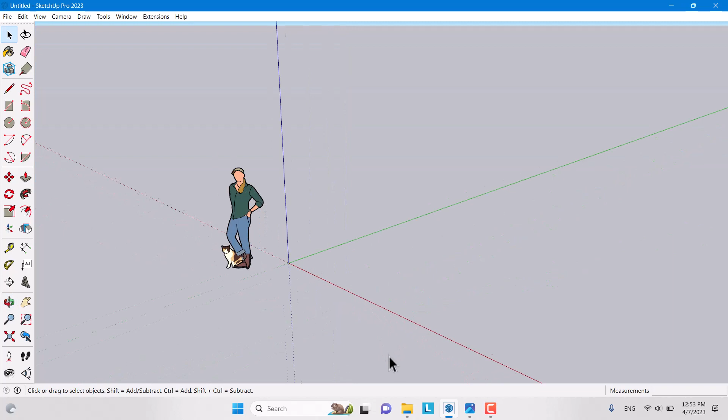Today we want to talk about how we can create this type of electric posts in urban street cities and designings. I'm gonna come to the SketchUp 3D environment and start drawing with this type of electronic box in here with some orange color.

I'm gonna draw some type of stand for it with different dimensions, for example 100 to 200, and now I want to extrude it about 100 centimeter. Alright, this is our base.

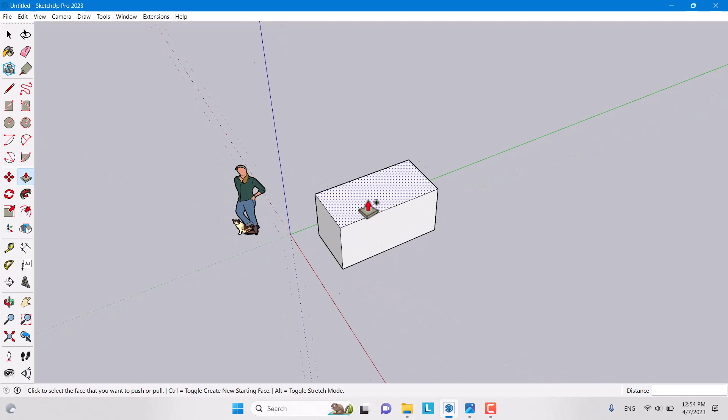I'm gonna click on it and make some type of group in here. Now I want to create this type of orange house and holder, so I'm gonna click on the rectangle and draw it with different dimensions, something around 90 to 56.

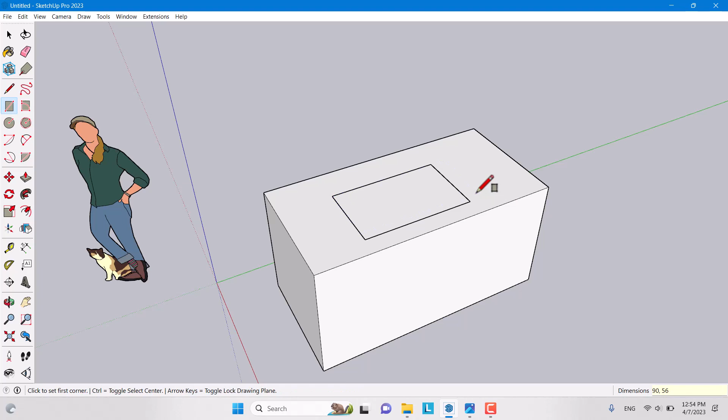Now I want to re-extrude it again, some type of number of 180, and I think it's good now. So I'm gonna click on it and close it.

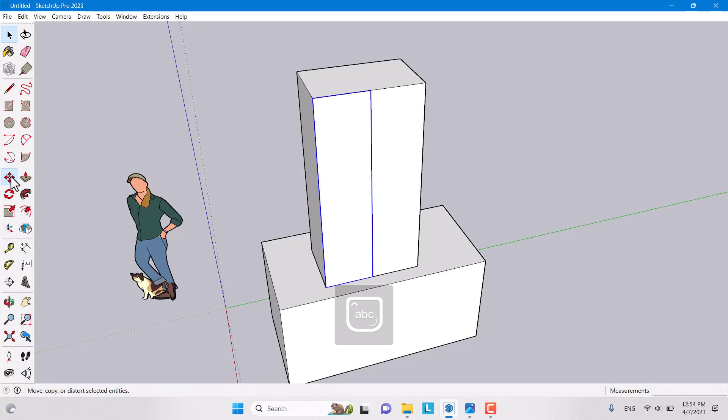Now we need some type of doors for it. I'm gonna draw some rectangle from this place to this place, convert it to a component, call it door, and press enter. I'm gonna make a copy of it here, click on the flip option, and flip it on the green axis.

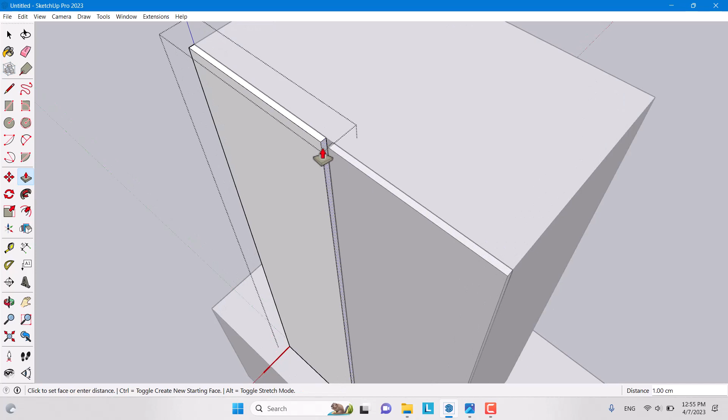So I'm going to double click on it. Now I want to extrude this door something about 1, and now extrude from this place to this place about 0.2. That's good. Now we want some type of details in here.

For example, I want to make some bevel on my door, so I'm gonna click on the offset option. We need two offsets: first offset about 4 centimeter and second offset about 6 centimeter.

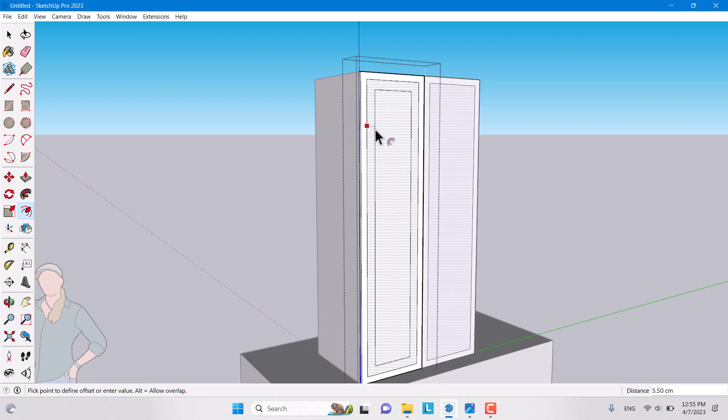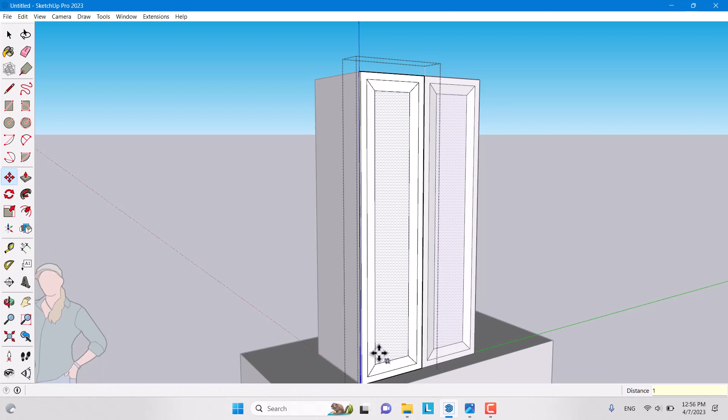Now I'm gonna click on the second face we created, click on the move option, press Alt on my keyboard and left click. If I want to bevel it to the outside, I can move it on the red axis, and if I want to bevel it inside, I can set the number very carefully, something about 1 centimeter. Now we have this type of thing, but I think bevel to the outside is much better.

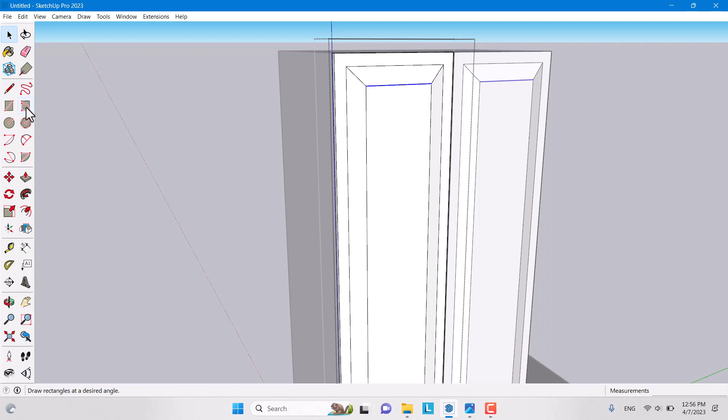So I'm gonna click on it and extrude it on the red axis, some number about 2 centimeter. And for the final detail, we want some type of edges and lines in here, like that.

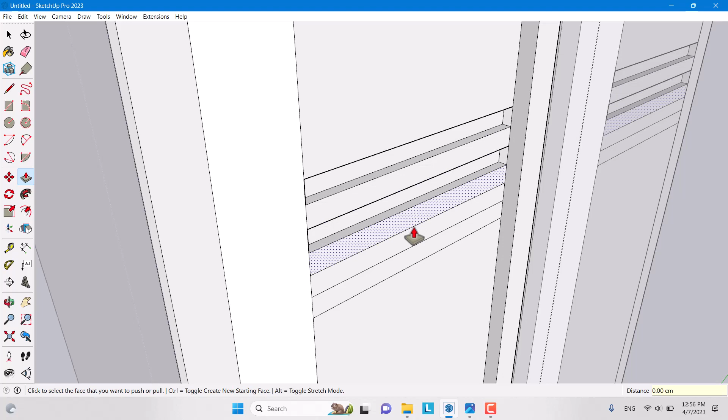I'm gonna create a copy of them and extrude them one by one, for example extrude to the downside about 1 centimeter, like this. And I can delete this line.

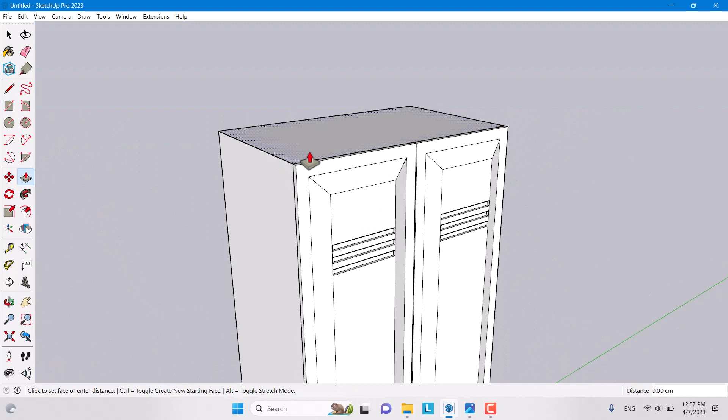So as you can see, this is our locker, and we have some type of sloped roof for it. I'm gonna draw some type of rectangle in here and extrude it a little bit, about 10 centimeter, from this place to this midline, and from this midline to this place, re-extruding it again like that.

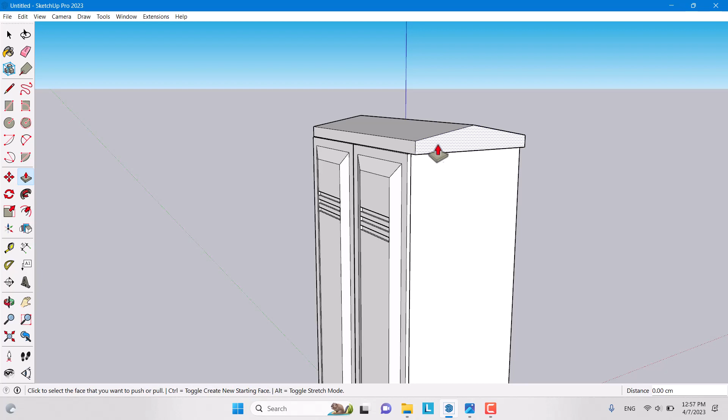And a little bit I come it to the outside, about 3 centimeter each side. I think everything is good, so I'm gonna click on it and create some type of group in here.

I delete this character, select all of them, and move them a little bit here. So now let's get for this electronic post with some concrete material.

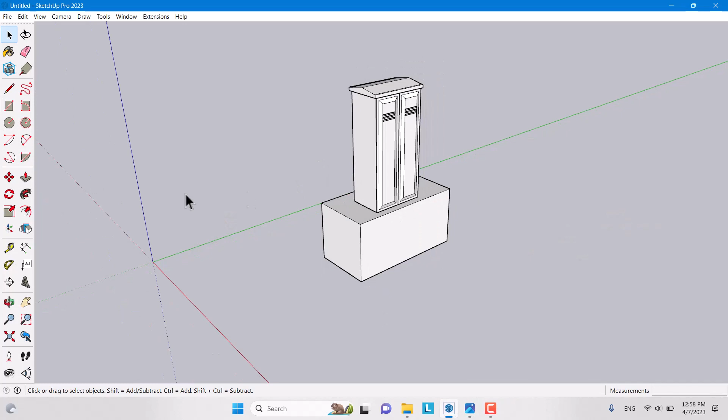Actually these type of electronic posts have two sides with the same shapes on their faces. I'm gonna draw a rectangle with dimension about 40 centimeter to 40 centimeter, extrude it about 900, and then extrude it a half, something about 20 centimeter.

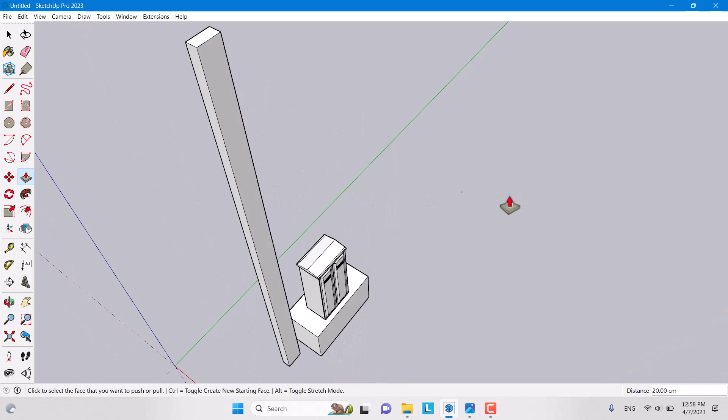I click on this face and want to rescale it from this place about 0.8, and from this place 0.8 again.

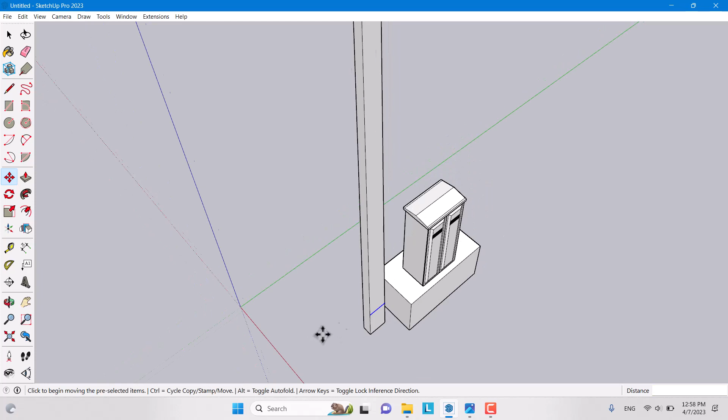Now I come to the downside, click on this edge, and want to make copies of it with different dimensions. For example, every 75 centimeter we need one copy, so I'm going to type 10x, 12x, and I think it's good.

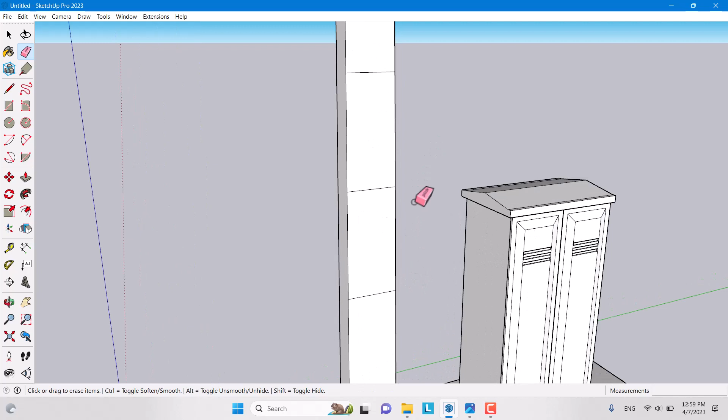So now I want to delete this type of extra lines like that, and now I delete these extra lines in here like this, and now we clean the model.

So I double click on it, create some type of component here called electronic post, and press enter.

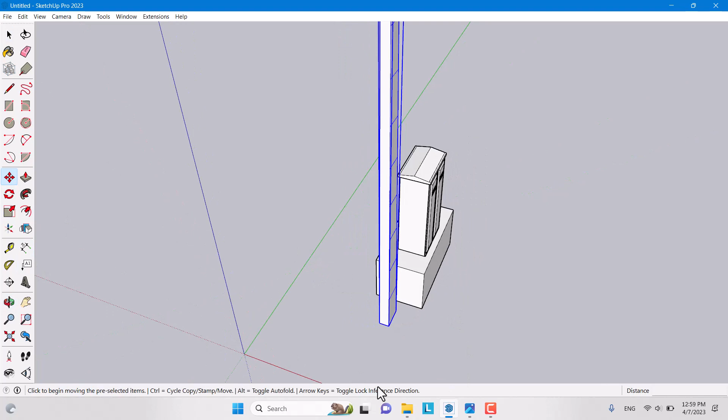So I want to make some copy of it on the red axis. I'm gonna click on it, and now I think 30 is good. I'm gonna flip it on the green side like this, then move it back in here and double click on it.

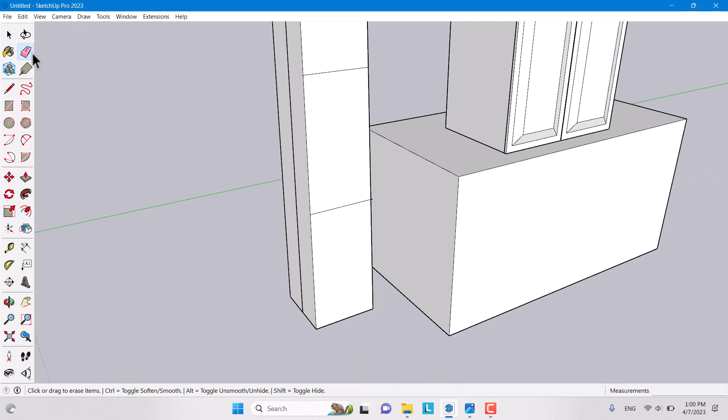So now I want to delete this type of extra lines. I press on the eraser option and delete these lines again. Now actually we have this type of two components same as each other.

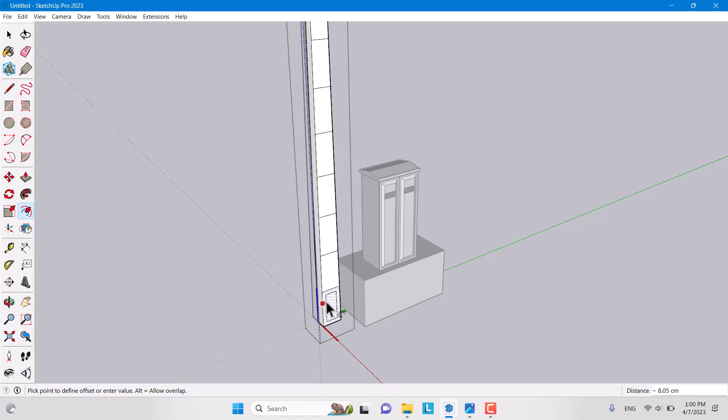So I'm gonna click on one of them, use the offset option, come a little bit backward, and set my dimensions about 6 centimeter for each offset like this. I do this job for all of them.

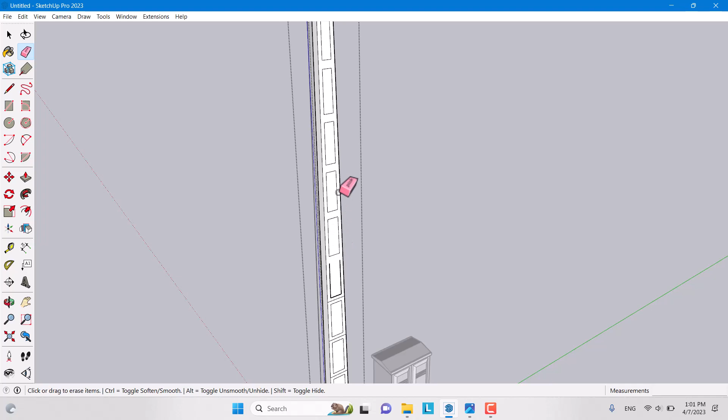It's really great because we have very different types of details on our 3D model, and it's really interesting. You can create every type of model you want in SketchUp, but you must be patient and get professional in using the methods and options.

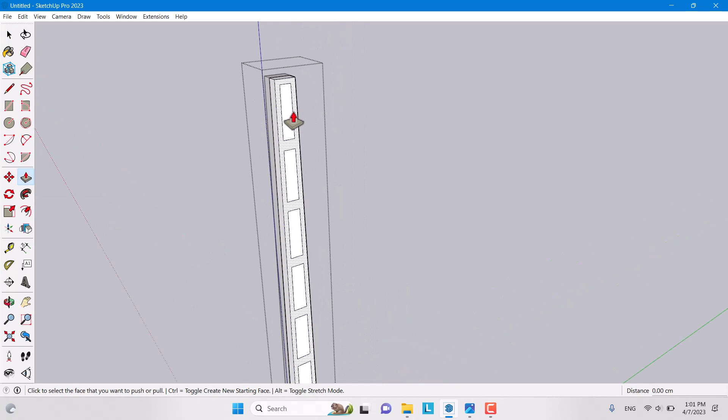So now I delete all of these extra lines in here. I press on the push or pull option, and all of them must go to the back side about, for example, 4 centimeter. So I'm gonna extrude all of them 4 centimeters to the back side like that.

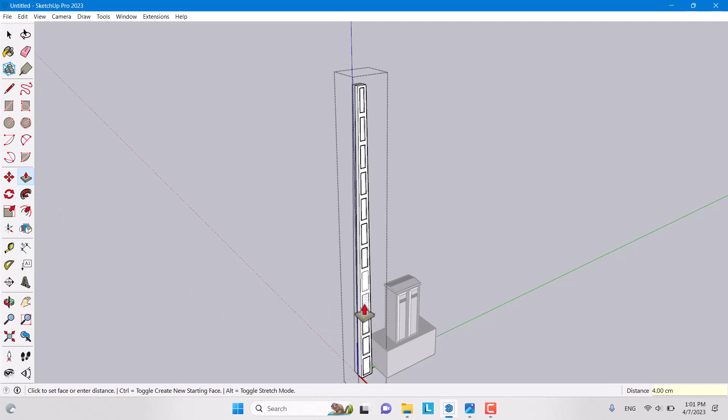4 centimeters. Now, as you can see, we create the electronic post here. I'm going to save this model as 'electronic post' and press enter. I come back to my picture.

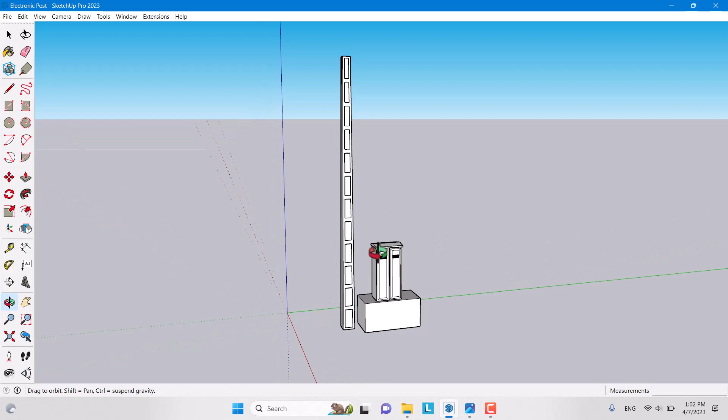Now I want some copies of them on another side, so we create all of the model here. I come back to my 3D environment. I create a group from these two electronic posts and copy them on the green axis.

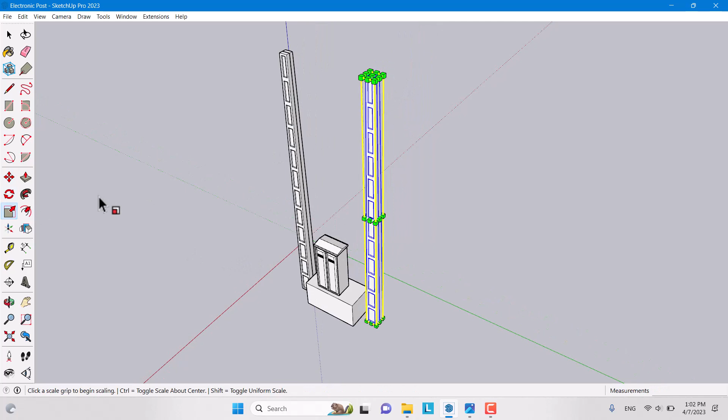Now you can see in the photo the right side post is actually shorter than the left side, so I'm going to scale it. I press the scale option and rescale it, something like this, 0.75, and now I think everything is good.

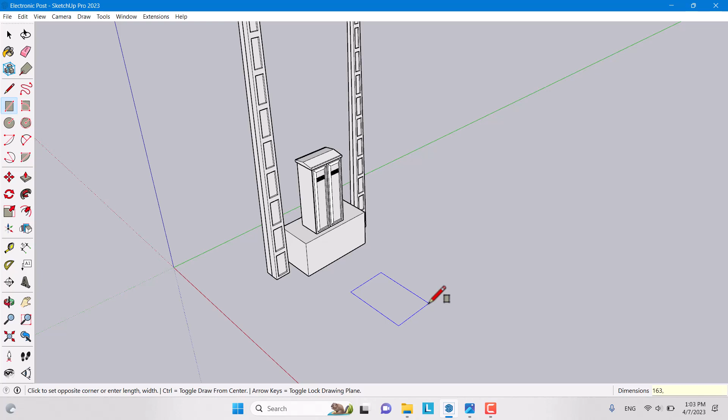I come back to my model. We have this type of transmitter here, so I want to create some type of box here, about 163 to, for example, 111. Now I want to extrude it again, something about 100, click on all of them, and create some type of group here.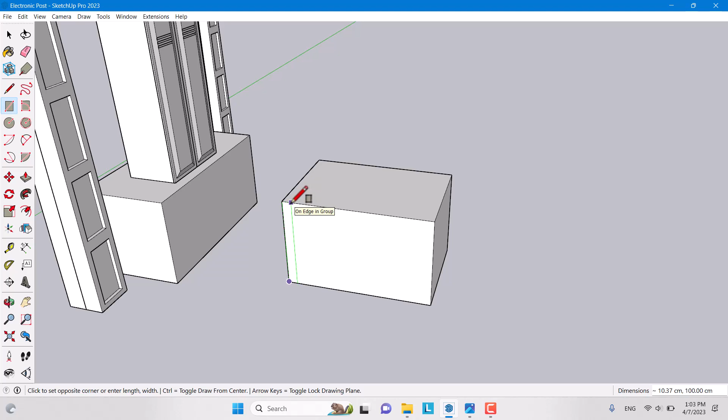Now I want to make this type of repeatable lines on the transformer. I'm going to click on it, and now I want to set some type of dimension for it, like this. Now I press on it.

I want to create some type of component. I name this component, for example, 'repeat', like this, and press enter.

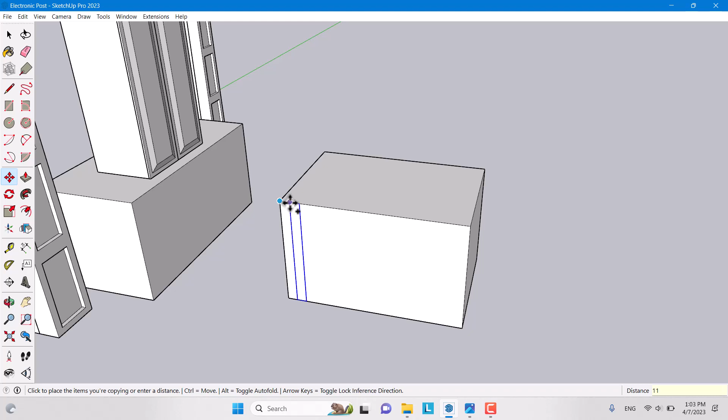Now I want to make some copies of them, about 11, and repeat it like this. Now I want to select all of these rectangles here, convert them to the component, and create some type of group here.

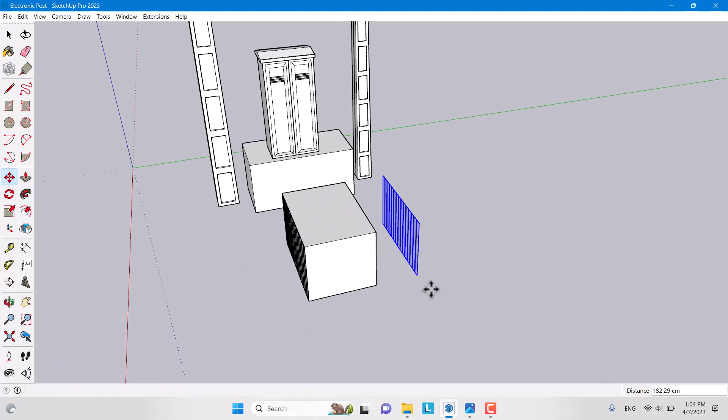So I want to copy them, press the flip option, and flip it on the green face like this. So I want to fit it on my model like that.

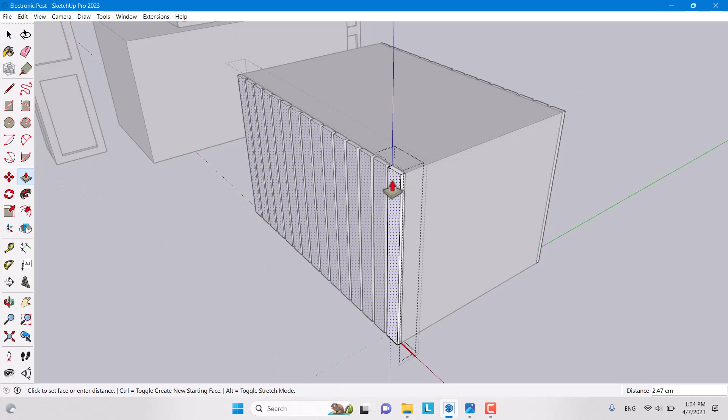Alright, now I want to open it and extrude it. The extrude number depends on you; for example, 1.6 is good. And this is our, for example, transformer.

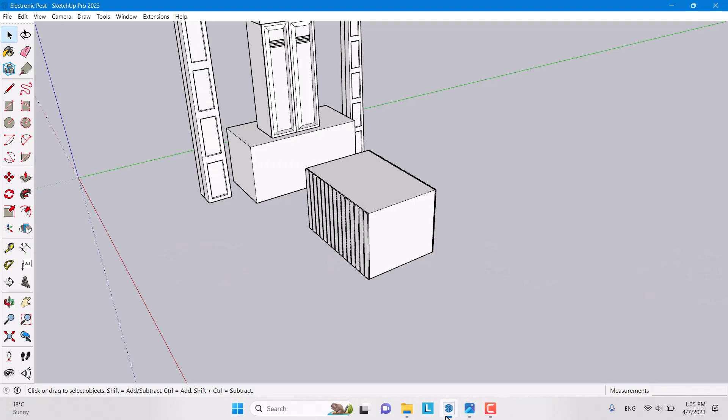If we want to make some other details on them, we can create these type of cylinders on them, and it's really easy. I come back to my model, and now I want to make some copy rotate of them here.

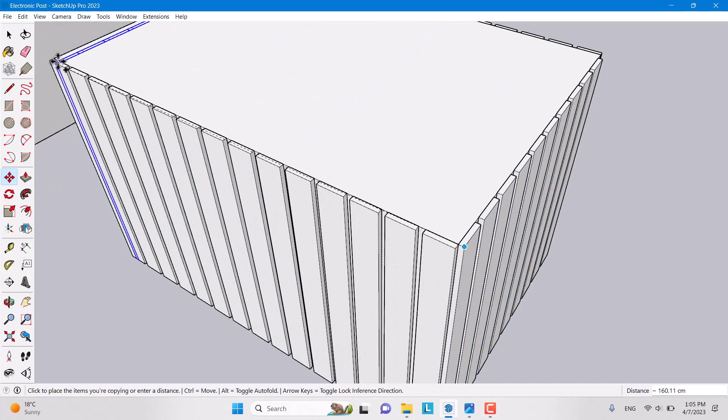And I move them to this place, and another copy to this edge like that. I want to open my group here.

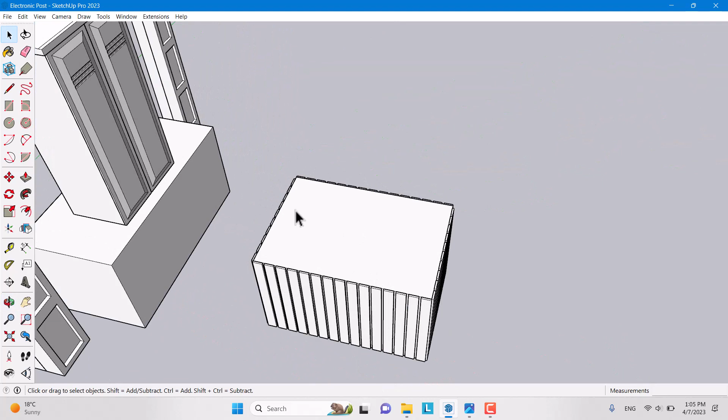I want to re-offset it again, some offset about 20 centimeters, and a little bit I bring it down, something about 20 centimeters here. So now we have three types of cylinders on our transformer.

I'm going to draw some type of line from the midpoint to midpoint, and I draw some circle like this with a radius about 12 centimeters, and delete these extra lines here.

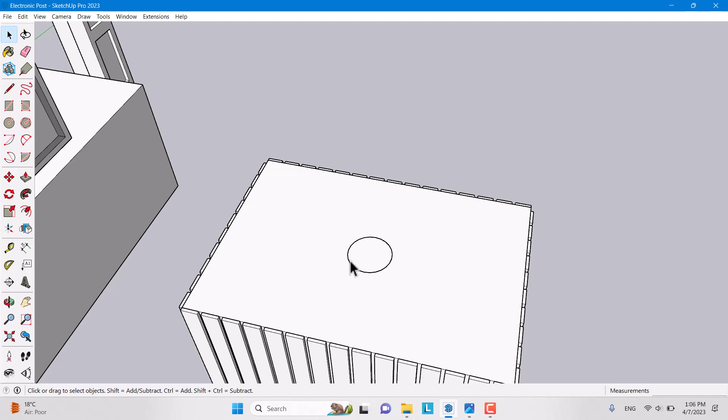I want to open my materials and entity info. I want to increase my segments to about 48. Now I want to re-extrude this cylinder like that, about 50 centimeters, and create some type of group of them.

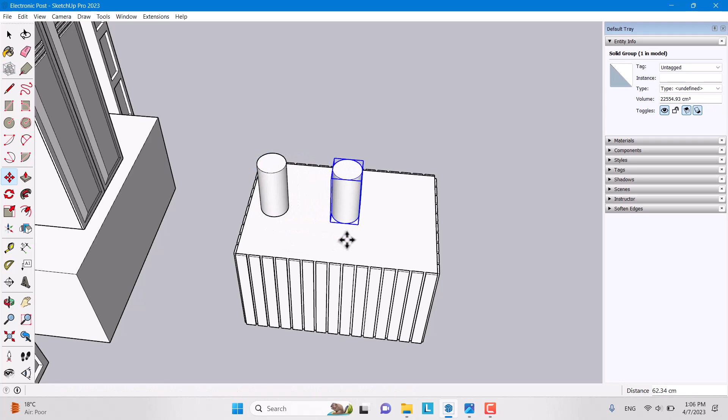Now you can make some different copies on them like this, select all of them, and create some type of group like that.

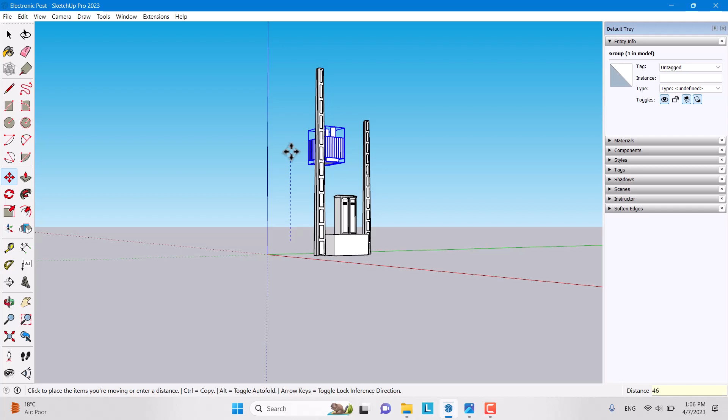Now I want to fit it to this place and make the height much higher, about 460, and now on the green axis about 66 like this. And now the only work we must do is create some type of holder for it.

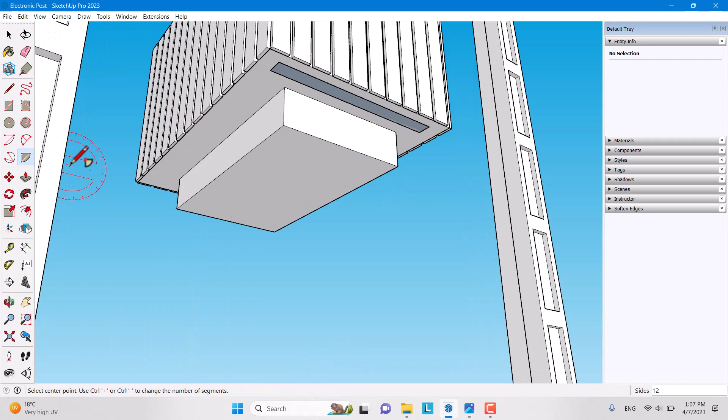For creating these holders, I want to extrude some type of line like this from this place to this place, and there are some other type of rectangle here, very fast and easy.

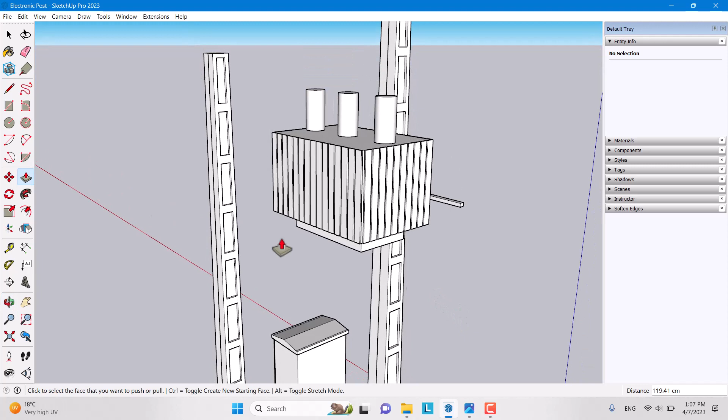So some type of shape like that. Maybe it's not really good or exactly like the picture, but if you practice, you can create much better results on that.

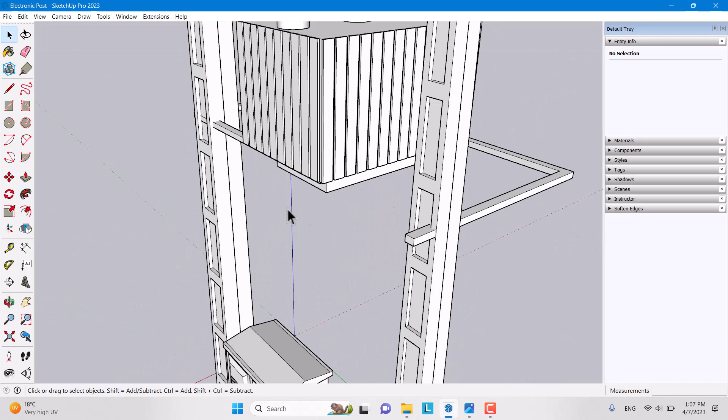Like this, I want to select this path here and press the follow me option and create this type of holder here, and re-extrude this face again to this place.

So I think everything is good now. I want to move it a little bit to this place like this, and I want to select all of them and create some type of group here.

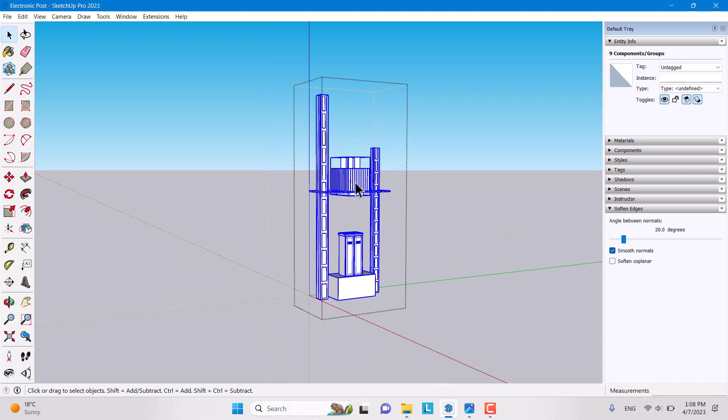We have soften edges here. I want to click on it, open them, soften components, and create some type of model like that.

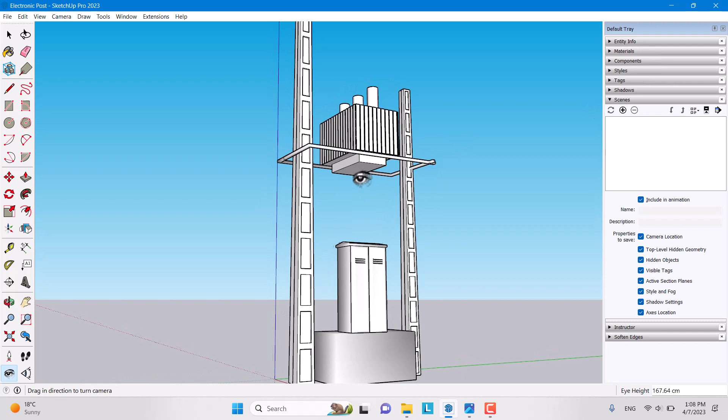Now I'm going to move it to the origin point and set some type of eye height like this, and close my entity info. I come to the scenes option, and I want to set my eye height. I'm going to type 1.60 like this, and I want some type of 2-point perspective like that, and I want to create my scene.

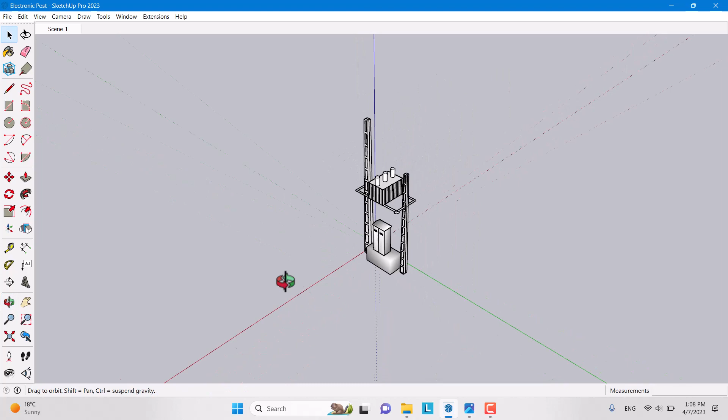So this is our 3D electronic post here. If I click on scene one, you can see our complete model.